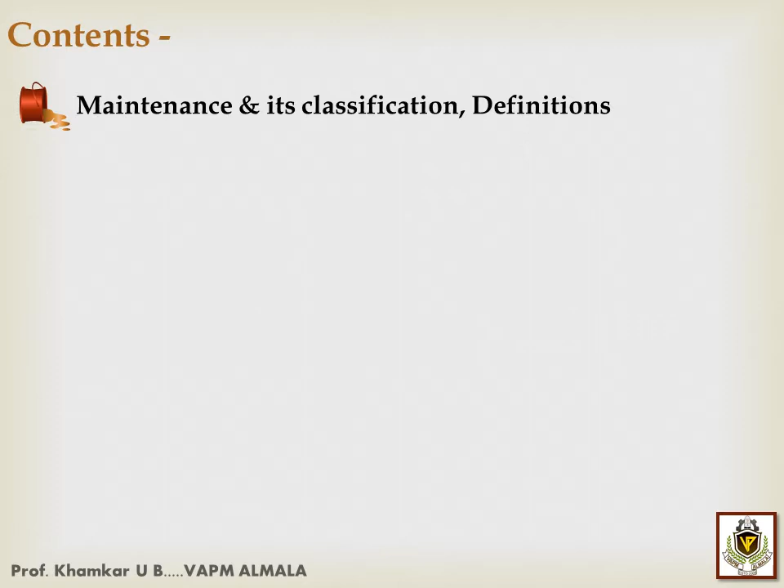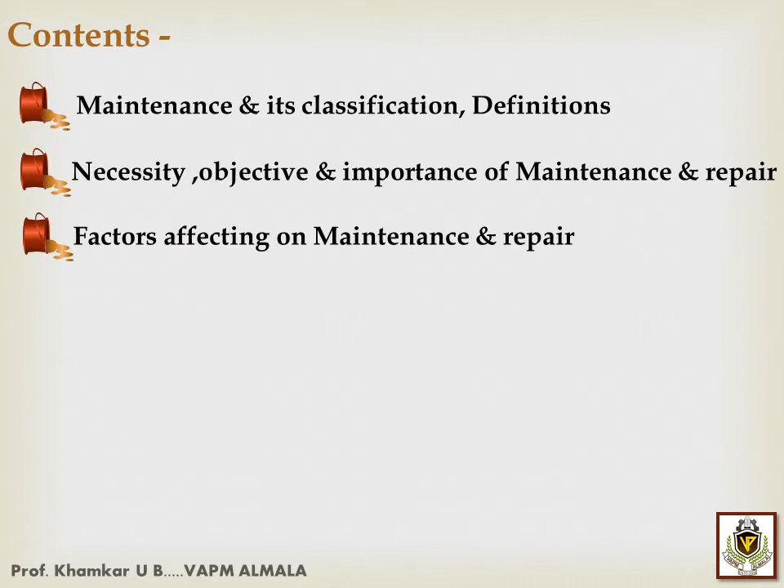What are the contents we will see in this chapter? The first content is maintenance and its classification and some important definitions related to basics, principles, necessity, objective and importance of maintenance and repairs. Factors affecting maintenance and repair work. Advantages and disadvantages or limitations of maintenance and repair. Approach of effective management for maintenance and repair, and detailed classification of maintenance.

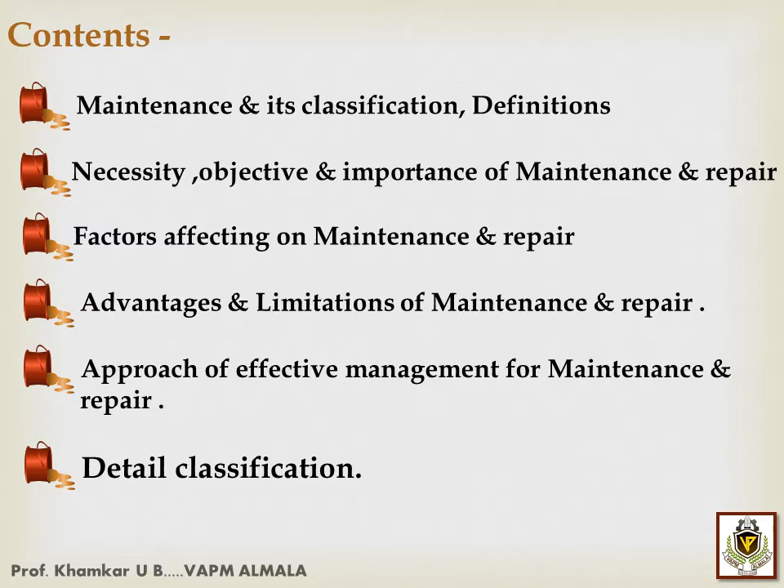So first we will start with the definition of maintenance. What is meant by maintenance? Maintenance engineering is defined as the work done to keep the civil engineering structure and work in condition so as to enable them to carry out the function for which they are constructed.

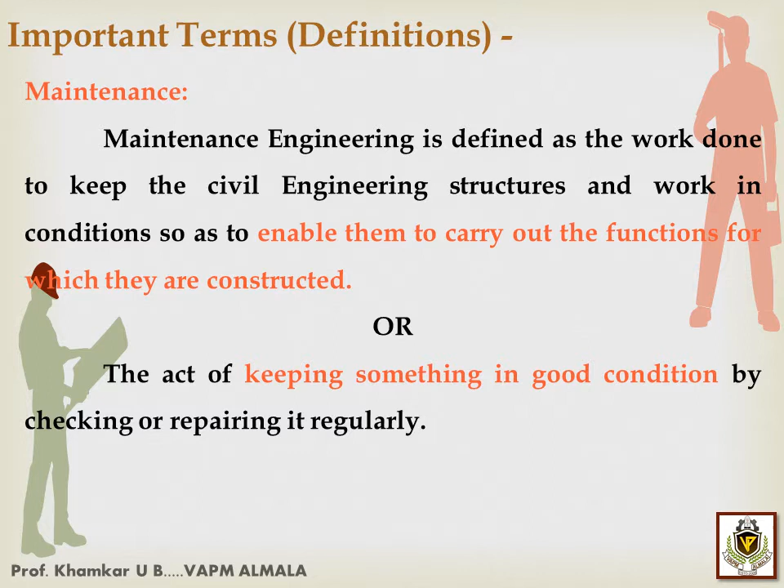मेंटेनन्स असं म्हणणार आहोत. We will see the next definition, that is repair. What is meant by repair? How will we define repair?

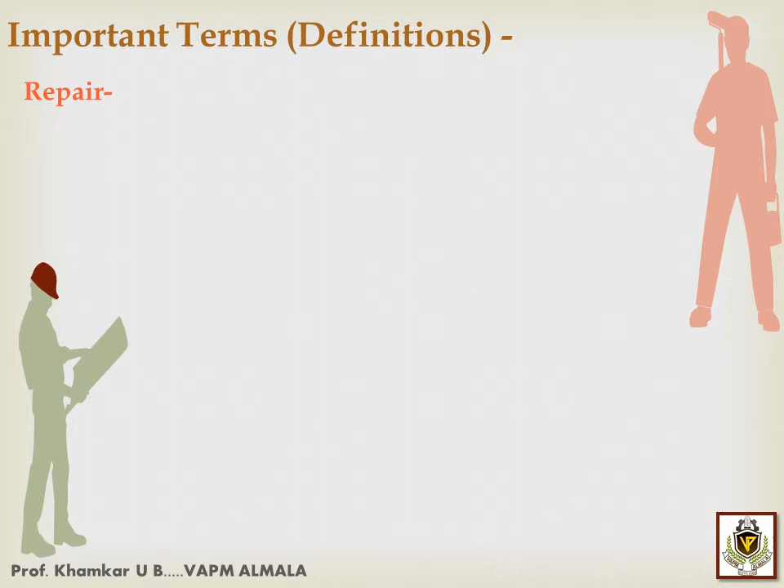Repair is the process of restoring something that is damaged or deteriorated or broken to good condition. The repair is the process of restoring something.

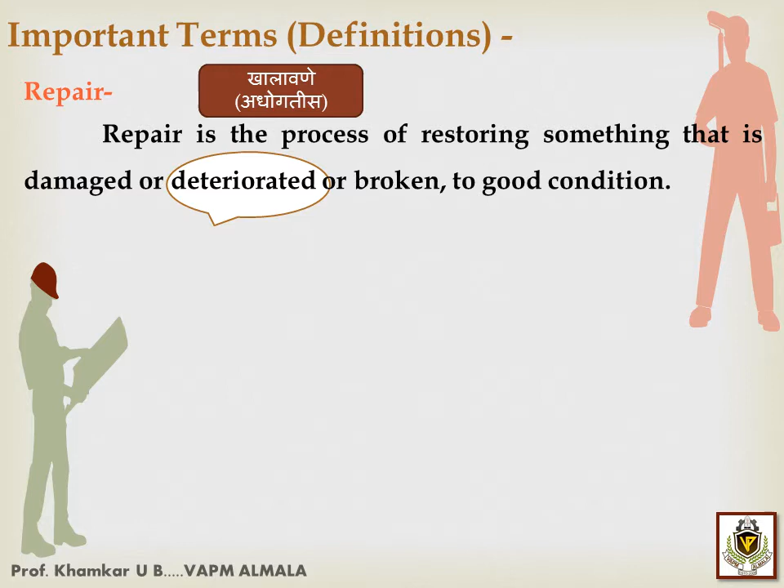It may be modification of damaged structure. It includes reconstruction of different components, different members, or repairing of different types of cracks, that is shear cracks, tensile cracks, etc. Repairing of electrical work, repairing of plumbing work or leakages work, etc.

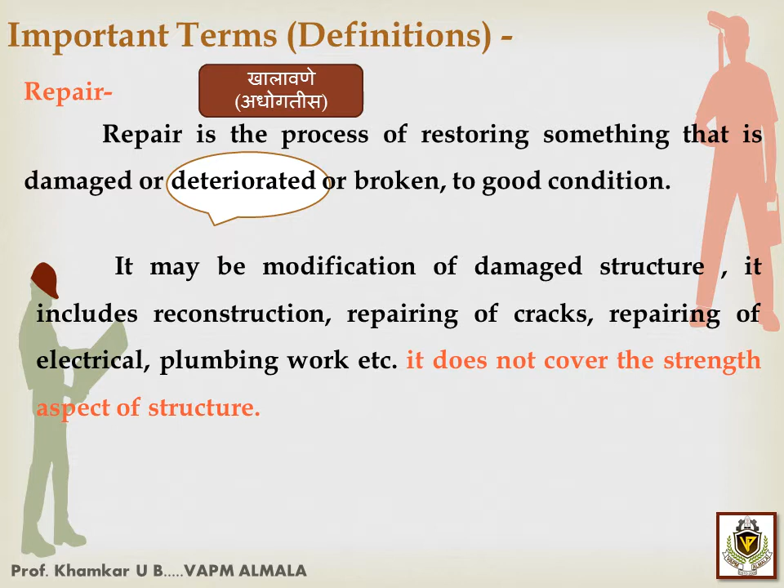While repairing work in progress or completed, it does not affect the strength of that structure. It means it does not cover the strength aspect of that structure. When we apply repairing on any structure, it does not increase the strength of that structure. It only increases the life or durability of that member.

Next, principles of repair and maintenance. So, what are the principles on which this repair and maintenance is dependent? First principle is the purpose of repair. So what is the purpose of repairing of the structure? The quantum of repair should be kept to minimum as the main intention is to slow the decaying process of the building.

Means, while we apply repairing process, it is kept in mind that its intention is to slow the decaying process. Means the damage should be minimized while we repair structure.

Next, analyzing the historic development. We will analyze in this the historical development of that structure. Means owner or contractor involved in preserving the building need to investigate or review this historical data of building. Usually the main criteria to look into are architectural investigation or any record of particular structure and assessment on its historic content.

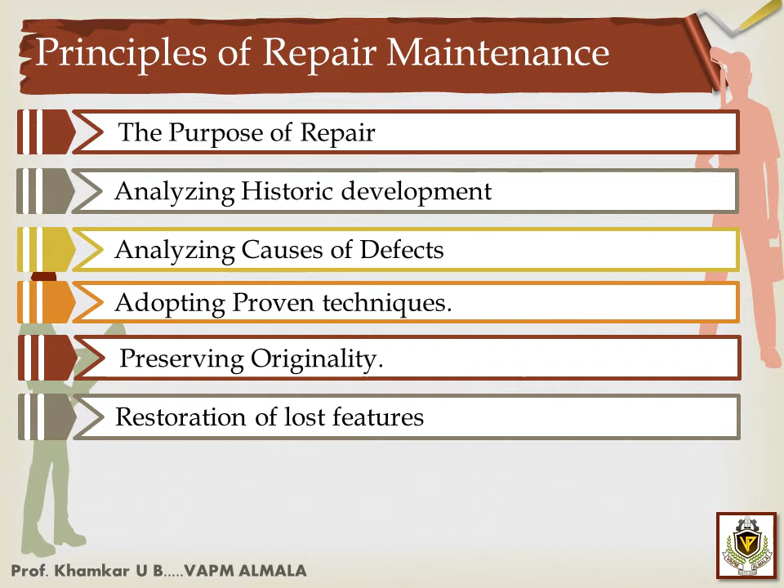Next, restoration of lost features. In this repair and maintenance work, the important principle is restoration of lost features. When some structures are damaged due to this, the structure loses its originality or historical development. So, by repairing technique, we will restore the lost features of that structure.

And lastly, removing of damaging alterations. It means any renovations, alterations or additions including remedial work done on building are important and to be recorded as a cumulative history of that building.

And safeguarding the future.

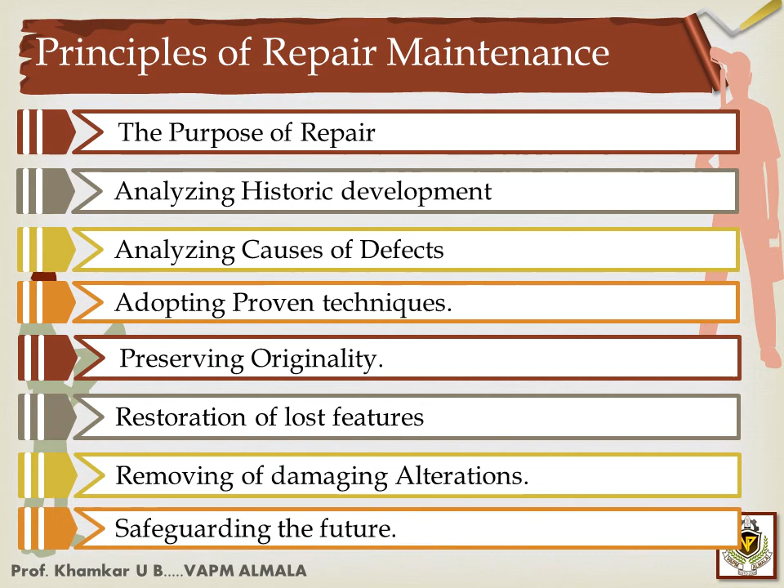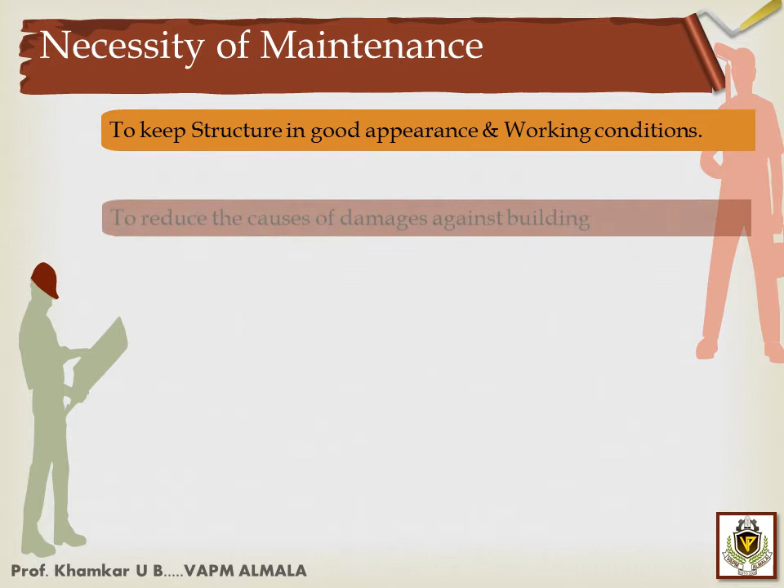Next point is necessity of maintenance. So what are the necessities of applying maintenance to any structure? First, to keep the structure in good appearance and working condition. To reduce the cause of damage against the building.

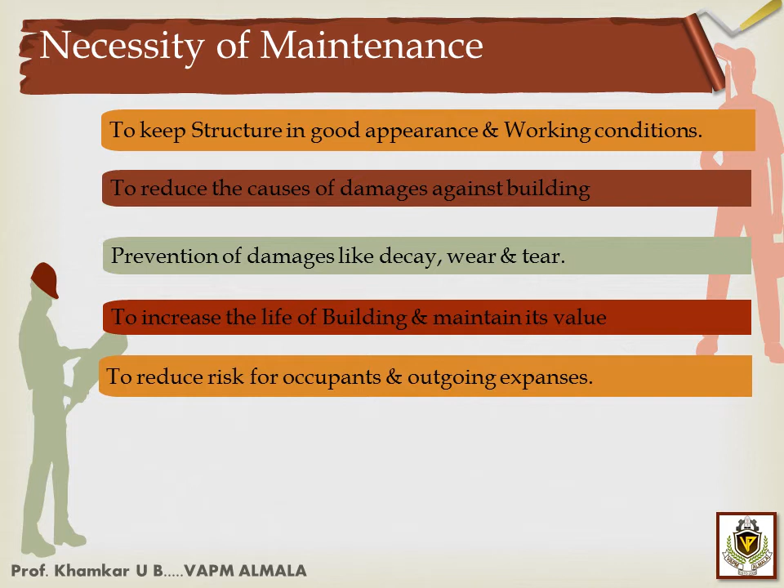Prevention of damages like decay, wear and tear. To increase the life of the building and maintain its value. To reduce risk for occupants and outgoing expenses. To repair defects occurred in the structure and strengthen them.

Adequate maintenance is important because rehabilitation cost is huge.

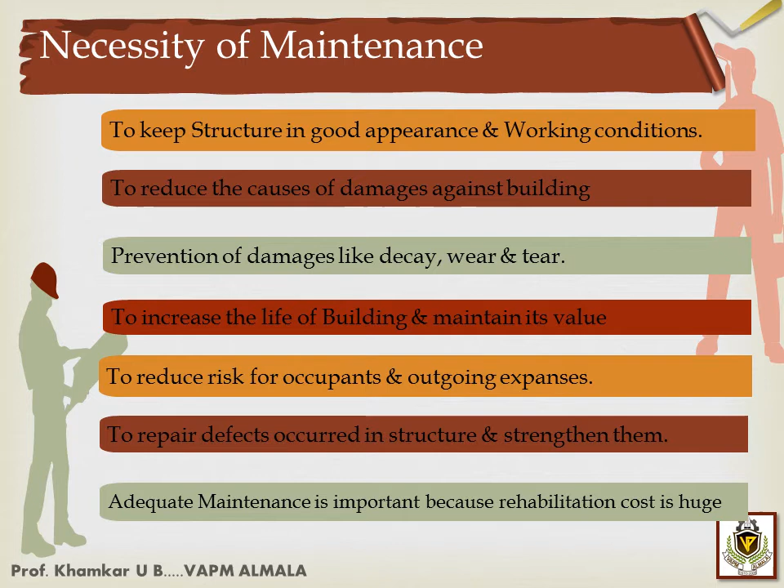Next, objectives of maintenance. So what are the objectives of maintenance? The first is to improve service life of structure. When we apply regular maintenance on any structure, it will increase or improve the service life of that structure. Shortly, it will increase the durability of that structure.

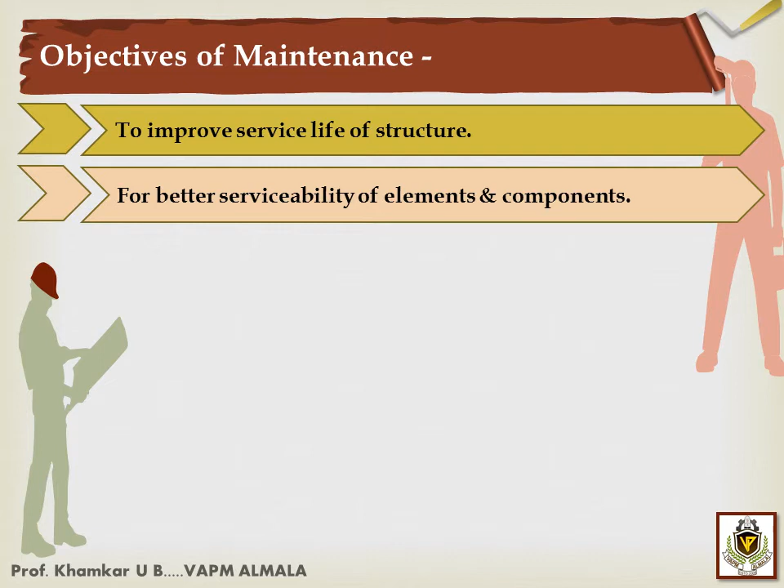For better serviceability of elements and components, this leads to early detection of defects. While we apply maintenance work on a periodical basis, it leads to early detection of defects. If any structure is defective, then we will find that defect or deterioration in that structure.

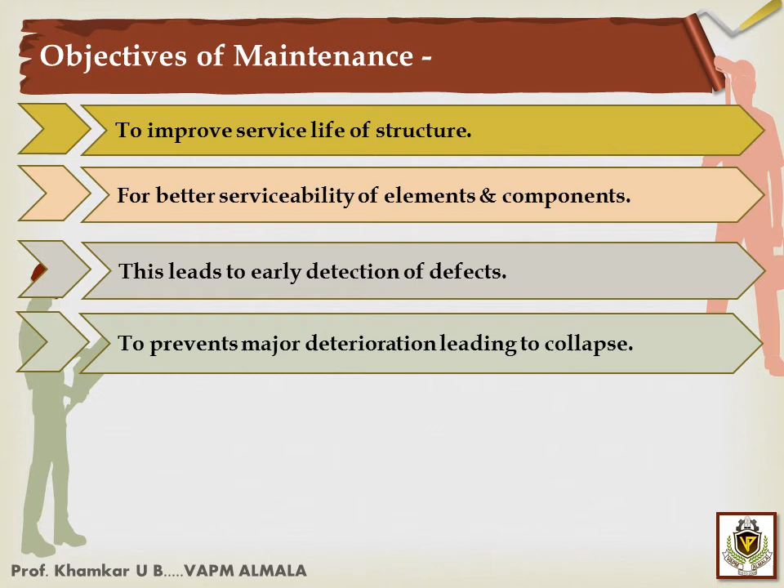To prevent major deterioration leading to collapse, by applying maintenance work we will prevent the deterioration leading to collapse. Prevention of losses due to natural agencies. Repair faults generated in the structure, and if necessary, we will strengthen them by applying different maintenance techniques.

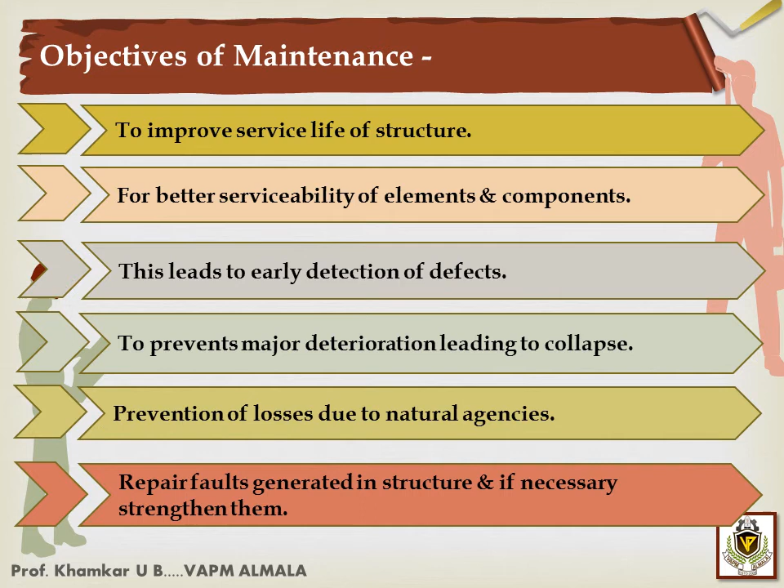The next is factors influencing maintenance and repair. So what are the factors affecting maintenance and repair work? We will see one by one all factors which are affecting the maintenance and repair work.

First, important factor is cost. How is cost effective on maintenance work? The cost of maintenance includes direct and indirect cost. Before coming to a decision to do maintenance, indirect cost factors should also be considered along with the direct cost. The direct cost includes the material cost and operational cost, which are generally 70 to 80% of total cost. Further, the indirect cost includes restricted access, safety aspect, and duration overhead charges, etc.

The first factor is cost. Second factor is faulty workmanship. Poor building workmanship is one of the most common factors affecting building maintenance. It is also observed that faulty workmanship increases problems and reduces the life of the structure.

Next factor is age of building. A structure and its elements consist of materials and components that are linked together to form a desired unit. The materials and components will start aging from the day they are used in construction. Further, over the period of construction, components wear out, reducing the building serviceability, which will affect its remaining useful time.

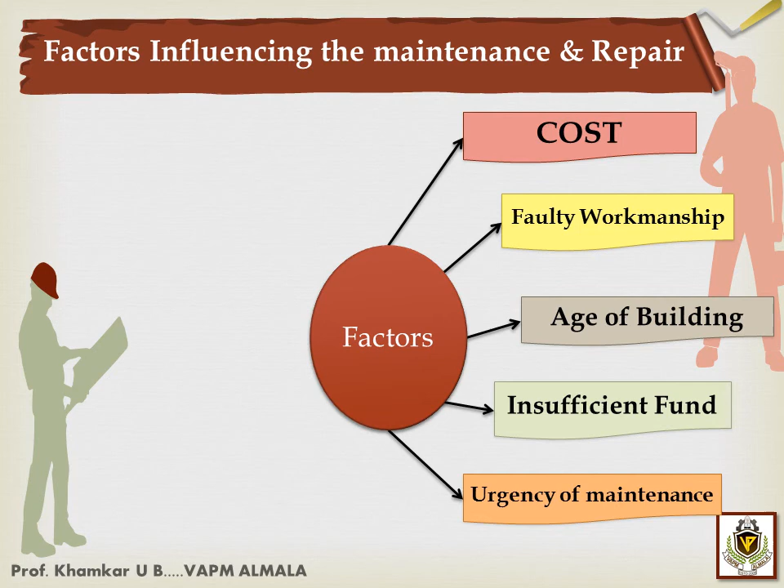Urgency of maintenance: the maintenance and repair need to be carried out immediately, within hours or days. Then accordingly, action must be undertaken. If somewhere the maintenance work is important, in that case we will maintain that structure urgently.

Next factor is non-application of policy. It means maintenance policy is a written document that provides maintenance strategy to be adopted by maintenance professionals in order to extend the life cycle of that structure.

Next is future use. The use of the structure as a whole must be considered while deciding when and how much maintenance is to be carried out at any given period of time.

Next is availability of resources. The required material, components, services, and equipment are necessary to undertake the maintenance and repair activity. This means, for the maintenance work, which type of material, components, and services are used while the maintenance work is going on is also an important factor affecting the maintenance.